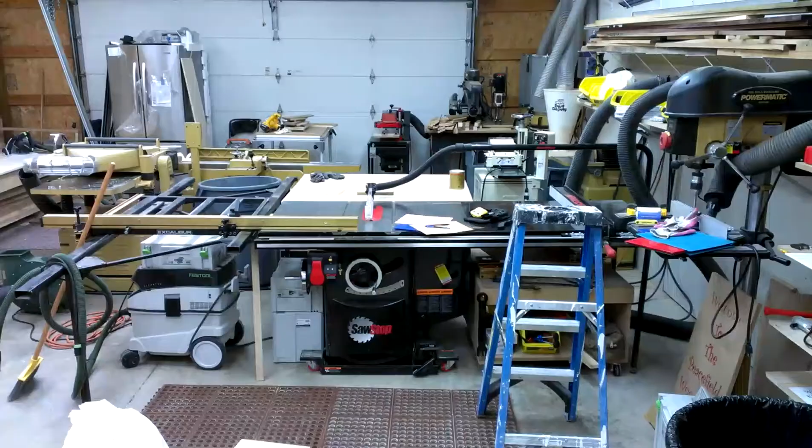I never really have liked the layout I've had in the shop here, and I've decided I'm going to try and change it and make things a little more efficient.

So what I did is I used to have my drum sander and my disc sander over here on the other side of the table saw, and there never really was enough room to use them unless I scooted them around, and then it became such a pain that I never really ended up using them that often. I ended up just using my RO150 usually on the MFT over there.

So I've got enough jobs now lined up where I've got to increase my efficiency. So what I did is I moved that stuff over.

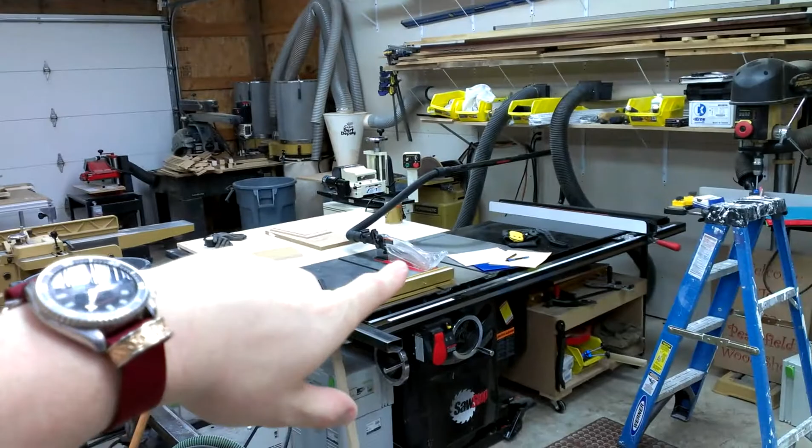I've got my drum sander over here. I'm going to go ahead and run a drop from my dust collector. I need to go pick up some stuff to do that. I scooted the table saw all the way over. I've got my slider here, all set up and readjusted.

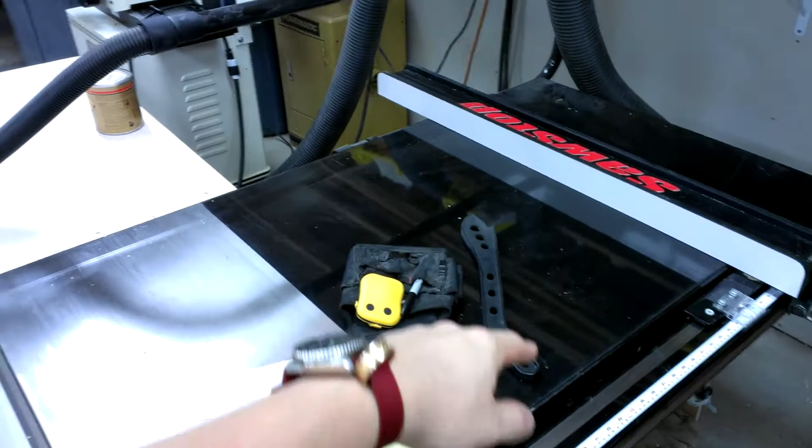And then I moved my planer, which used to shoot out stuff right along in here. Now on this side, I've got a full 14 feet from the planer to the garage door there, so I've got plenty of room for running longer sections of wood through it.

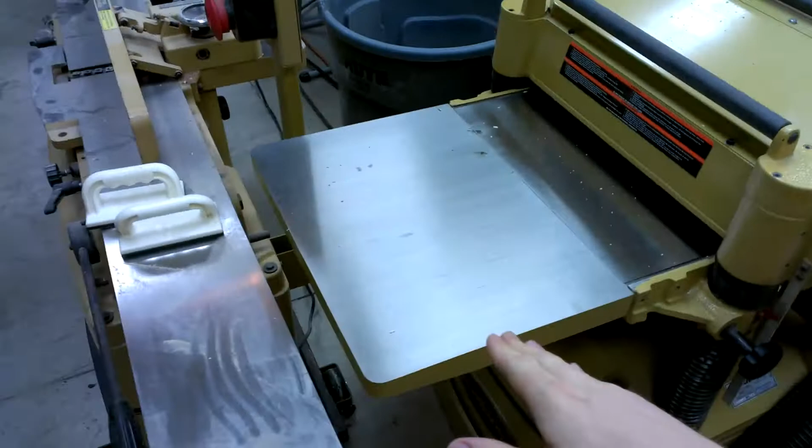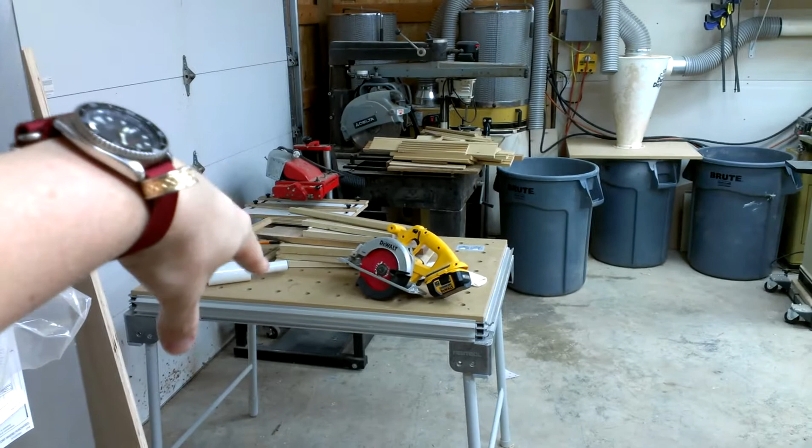And then finally, I moved my jointer over here to where it kind of sits underneath the planer, to where I can actually use it, because right now I don't really use the jointer all that much. If you remember in my other videos, it kind of sat along the door here, and I didn't have power to it, and I didn't have dust collection to it.

So I'm going to try and start using it more. Most of the time now, this planer does a good enough job, and generally if I really need to build something that's really nice, I just get it surfaced, or get wood that's surfaced from one of the lumber dealers I deal with, a humongous Extrema double-sided surfacer, and I just pay the 40 cents a foot to surface it.

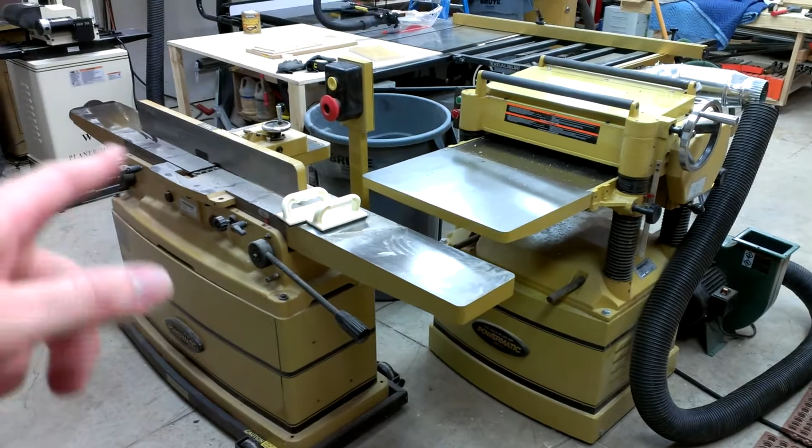So I'm going to try and start doing that myself. I've been reading a lot on WoodWeb in their business forums about trying to increase your productivity in your business. And anyway, that's what I'm trying to do now.

I've got my scrap bucket down there kind of nested between the jointer, the planer, and the slider there. And then over here, I think I'm just going to go ahead and leave my molder here.

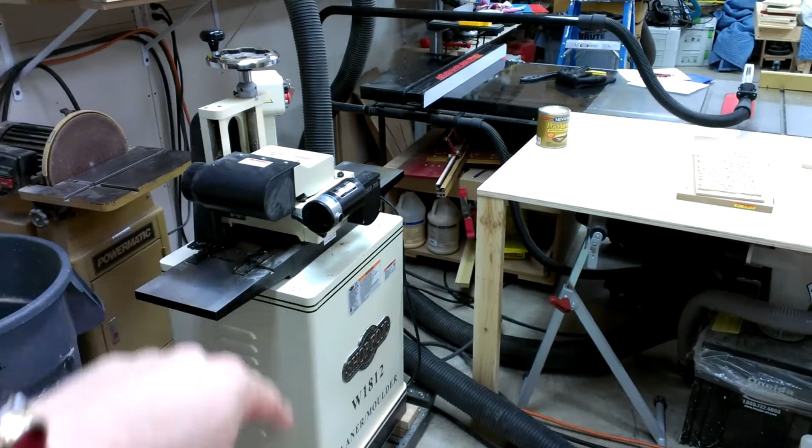This radial arm saw is going. I really am trying to get it sold at the moment. I need to build a new top for it. But yeah, I'm trying to get it out of my shop. I really need the space. I've been kind of trying to hang on to it just because I've had it for so long. I've had it for going on 10 years, and it's time to go. I don't need it, and I guess I shouldn't hang on to it for sentimental value.

So anyway, yeah, I think it makes things a little more usable. I don't use the drum sander that much, and I may try and find some other place for it once I get the rest of the drops in.

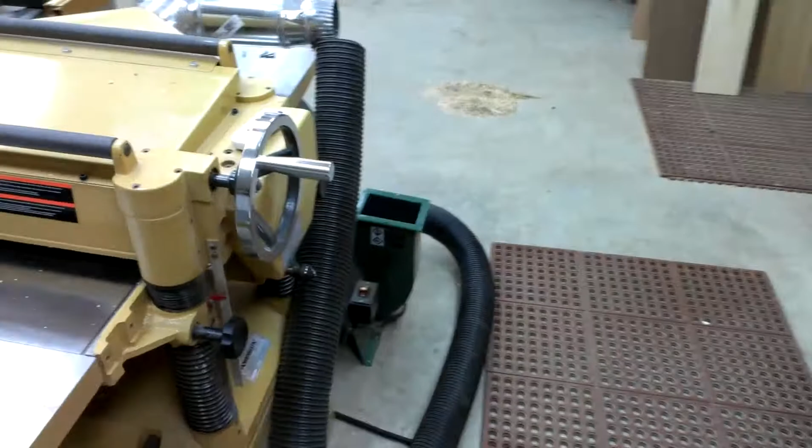I think what I'm going to do is just go ahead and run off that drop there, have one come down here for my planer, and then I've got this little booster here. By the time I run the dust collector over there through the plumbing and over a long hose to this, it doesn't really have enough power to pull the chips out.

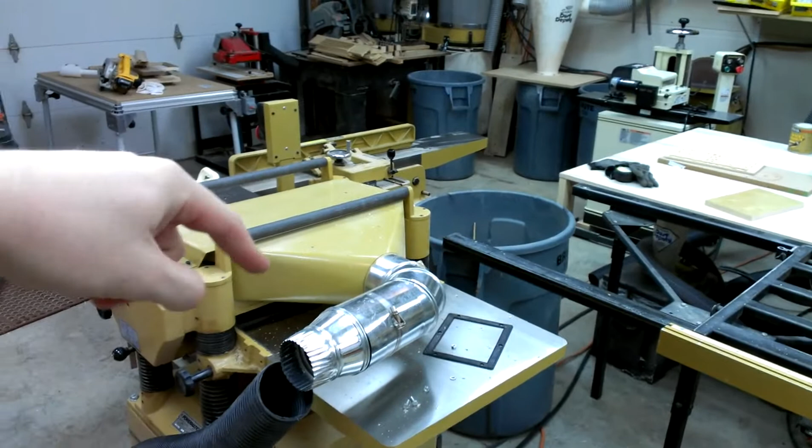So I'm using this Grizzly blower here as a booster, and actually I'll probably get some 5-inch, because it's 5-inch coming out of the planer, and this has a 4-inch, and I don't have any 5-inch flex, so I think I'll go ahead and see if I can pick up a piece of 5-inch flex there, run straight out of the planer over and down into that, and this will shoot it up, over, and back.

Probably not the most direct route, but there's so much crap on the ceiling in here, I don't know how easy it will be to run it up and over closer. So I'm just going to use this booster here. And yeah, that's what I'm up to.

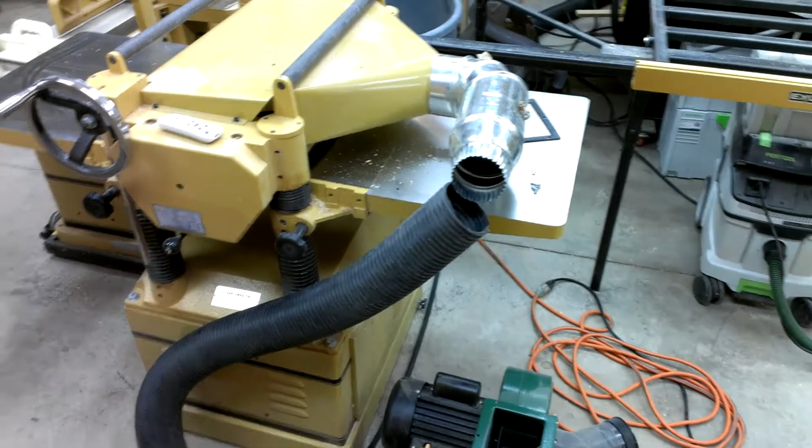Actually, I need to start on this cabinet over here. I really need to try and get that finished up this week. That's the stamp cabinet I think I showed a while ago. Really need to get that finished up this week and out of here.

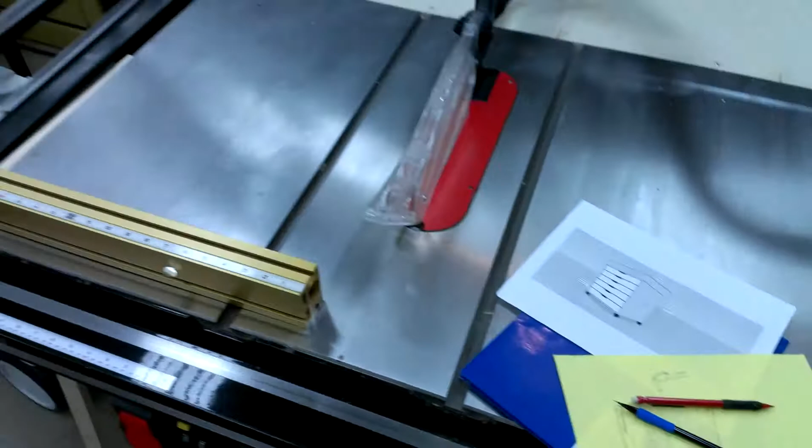Some other bigger jobs are coming along the pike here that I really need to get efficient and get my act together. Just trying to take it from what I'm doing now to the next level, and then looking at the next level beyond that. I need to put my drop over here for this too.

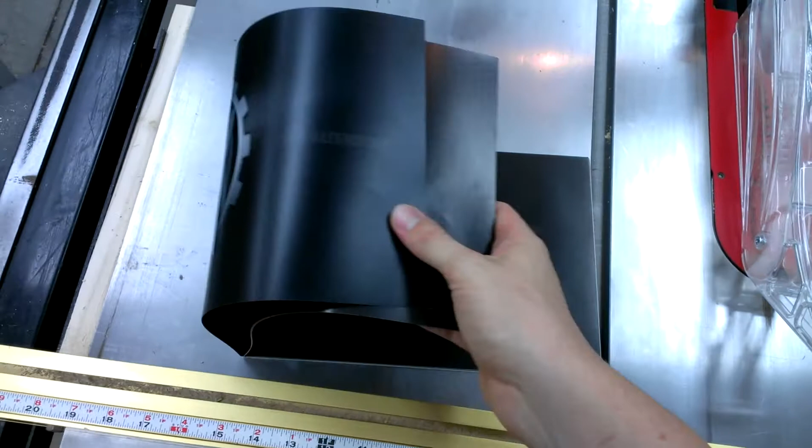I have been looking at saws. I was trying to sell the SawStop, and as you can see, I have not sold it. I kind of decided I'm just going to go ahead and keep it. Nobody really wanted to give me a decent price for it, and since it's only about a year old, I hated to sell it for half what a new one is. So I decided to keep it.

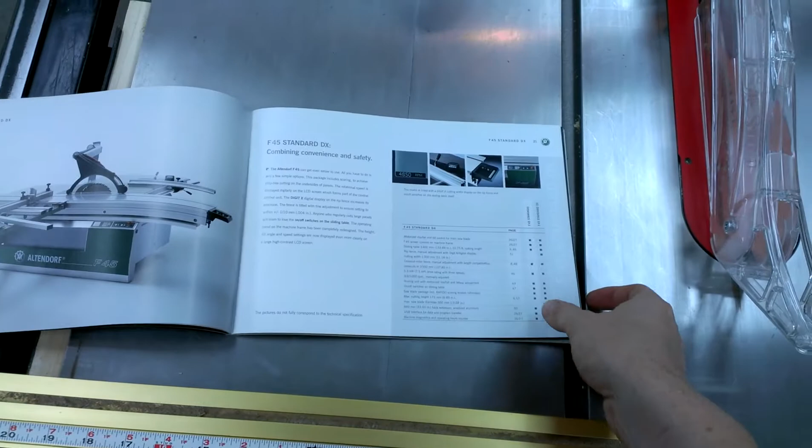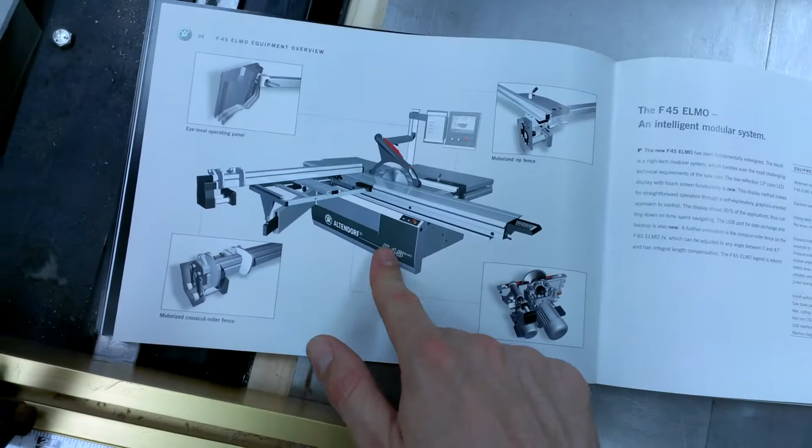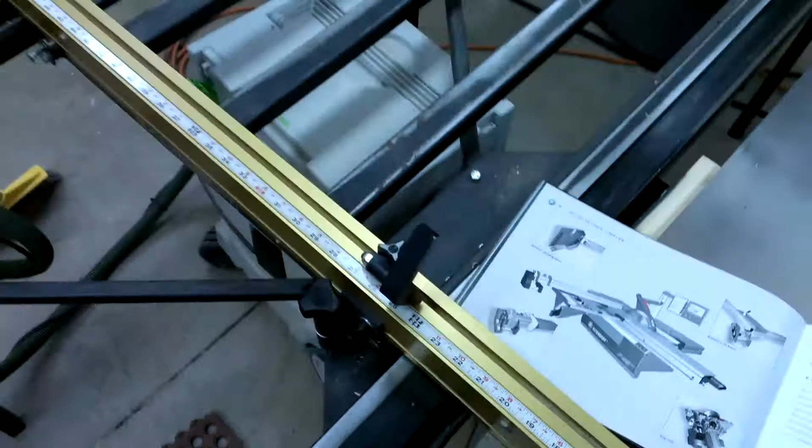Right now I'm looking at either an older SCMI SI16 or an Altendorf F45 Elmo, depending on how long I'm willing to wait. The Elmo is really cool. The one I'm looking at doesn't have a touch screen like this one, but if you're not familiar with how a sliding panel saw works, this whole carriage slides back and forth, and you have a traditional rip fence over here, plus a fence out here, so you can do everything you can with a table saw, except way better. The carriage on the ones I'm looking at is either 3,200 or 3,800 millimeters long, so you can straight line rip 10-foot lumber on it, no problem.

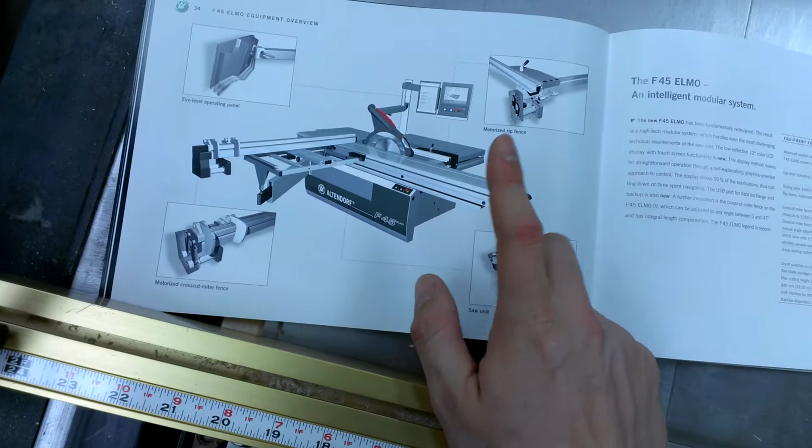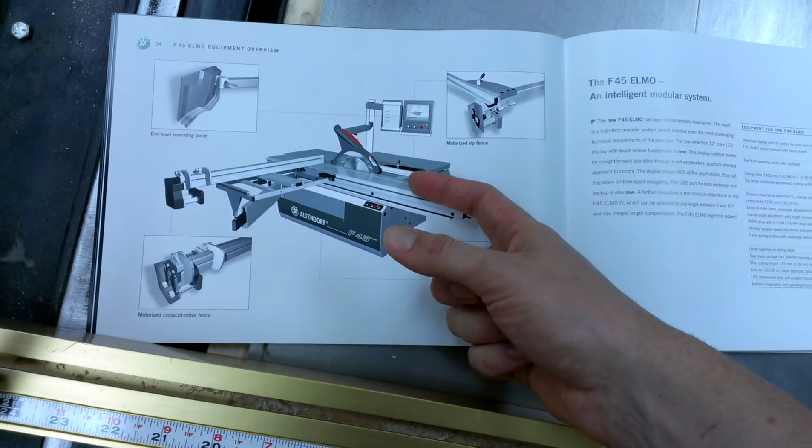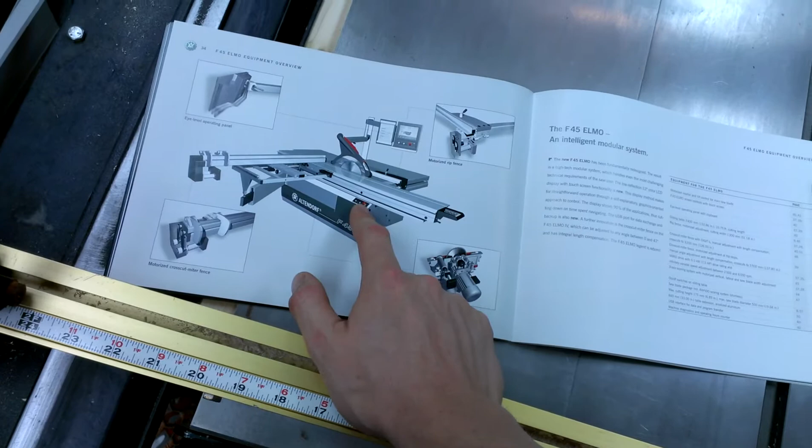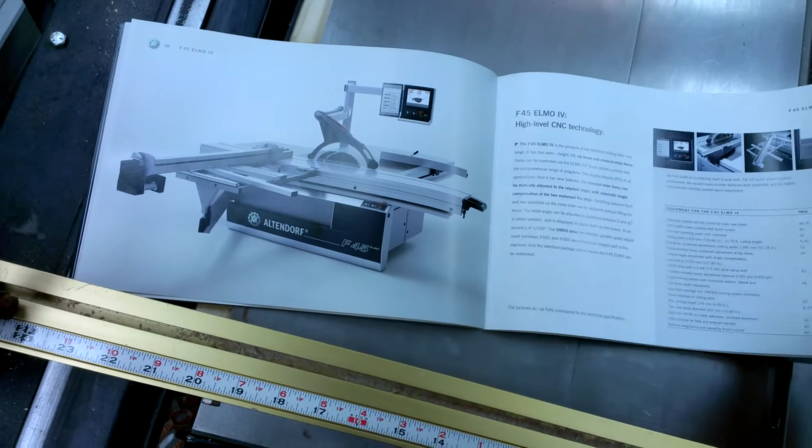The one I'm considering has a motorized fence with a control panel like this - you punch in your width, and it moves the fence back and forth. I haven't decided whether to get a more expensive one like this, or put the money towards a new building instead. I'm still noodling with what I want to do there. I'd really like one with motorized fences, but I think I may just go ahead and get the SCMI - it's about half the price of the Altendorf, and I figure I'll get one of those eventually.

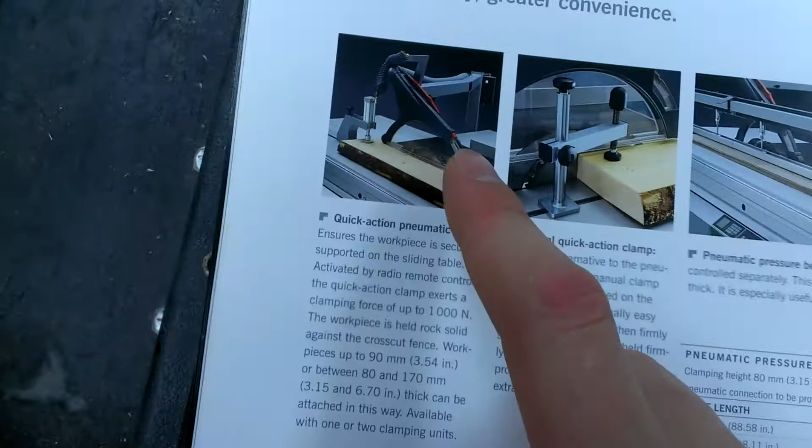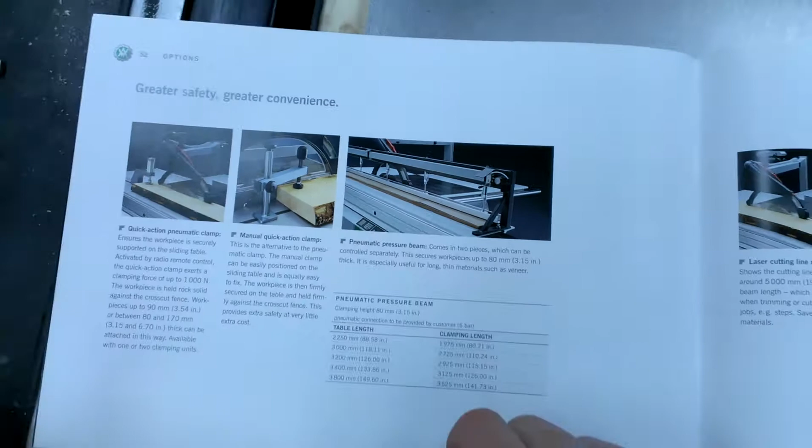But I wanted to show you, for straight line ripping, this is just the greatest idea ever. There's a pneumatic clamp, or pneumatic actuator - on this one it's a beam with pneumatic actuators, so all you'd have to do is slide your board on there, hit the air, and it clamps it. Like on this slider here, except it's 10 feet long - you slide it along, straight line rip it, then slide the board over against the rip fence and rip it to width. Right now I have to straight line rip everything with my track saw, then rip it to width on the table saw, and it's just a pain in the butt.

Busy day - I just went through here and shuffled stuff around in the shop. I've got to go meet with a client here. Just staying busy, hoping this new shop setup works out a little faster. That's kind of been the bane of my existence - production speed - because I'm torn between the shop here and the farm, and it's difficult to balance everything out. So I'm hoping this new arrangement will speed things up.

There's just enough room where the fence on the table of my jointer is low enough where it shoots over, and I probably should have just bought one of the multi-purpose units. SCMI makes a really cool one that has a sliding table saw, planer, jointer, and shaper all in one. But anyway, I guess it's too late now - I already got all this stuff. But anyway, yes, a sliding table or slider attachment for the table saw.